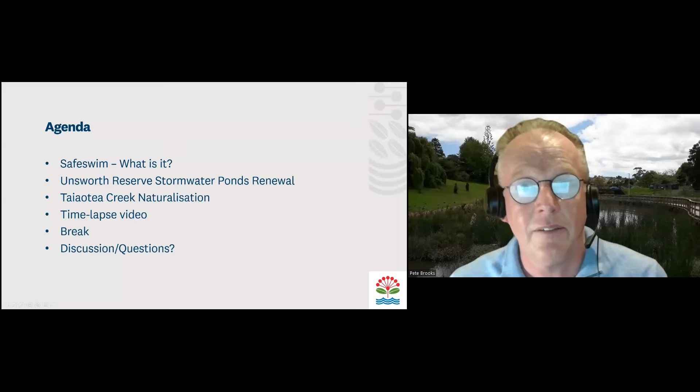Just a bit of background on why and what Auckland Council Healthy Waters Department does. Safe Swim is one of our key flagship projects. A couple of projects we're going to take you through are around the naturalisation of streams. As Scott has already alluded, there's a time-lapse video, a quick break, and then discussion and questions. I can talk for an hour and a half, but I'd rather not — really challenging questions and conversations are even better. So let's see where we go from here.

Auckland Council has a product called Safe Swim. Some of you may or may not have heard of it. Safe Swim is ultimately a collaborative program providing real-time advice on the level of risk associated with swimming at locations in Auckland. It's a partnership between some really key organisations in Auckland doing a great job, and it's spreading beyond Auckland as we speak, because there's real opportunity to combine the understanding of data across the wastewater network, owned and managed by Watercare, and the stormwater network, owned and managed by Auckland Council.

There's a department within Auckland Council called Healthy Waters with a specific target of improving water quality in our harbour, which we've been working on for the best part of 5 years specifically, though longer term overall. We use predictive modelling to do that — a clever piece of software that looks at weather patterns, tidal patterns, sea temperature aspects right the way through. All of this is underpinned by real, regular sampling on the beaches.

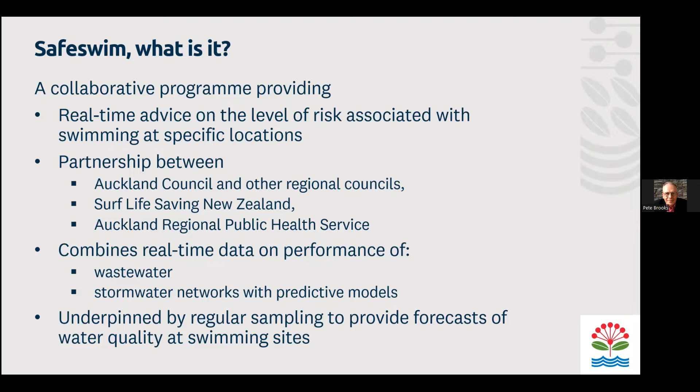Why am I telling you this? Well, everything we do — I used to be in Healthy Waters, I'm not anymore — but everything we do at Auckland Council around water quality is really based around ensuring harbour health, making sure it grows and continues to be the product it should be, and the amenity everyone can use.

So I'm going to talk to you about a couple of projects. These are stormwater ponds, and we worked very closely with Steinbring contractors — I'm eternally grateful for their involvement. They may be joining us later, and if they do, you'll get a contractor's view of how much of a tyrant I am. I was the engineer to contract on both of these projects, and I managed the team that actually designed and led the project from inception right the way through to completion.

Unsworth Reserve will be the first project I'll take you through. Unsworth is on the North Shore of Auckland, just to the west of the Upper Harbour and Constellation Drive on-ramp. In this reserve we have three ponds: an upper pond, a middle pond, and a lower dry pond. The flow of water goes from south to north, and what we're looking to do is improve these facilities, because they were built circa late 60s, early 70s. Engineering-wise, they were there to protect the environment and slow the flow of water, and they weren't functioning particularly well. There are a number of reasons for that, which I'll come to later.

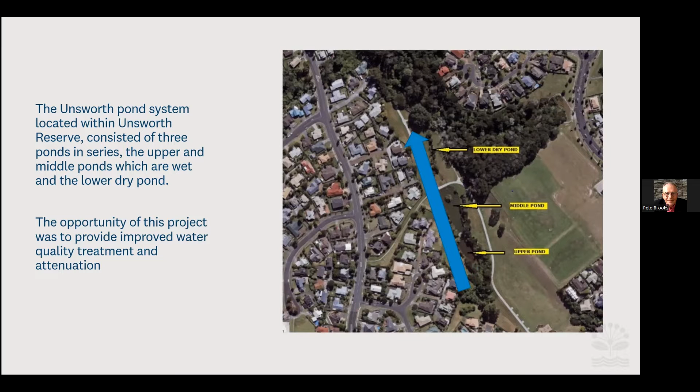What we really wanted to do was provide and improve water quality treatment and attenuation — keep the water away from the harbour for as long as we can, so that allows us to treat it more effectively.

The first thing we did was desilt the actual ponds themselves. The photo on the left is at what's known as a Truxor, an amphibious desilting machine. Basically it's a big hoover with a digger bucket on the front, and what that does is the hose pumps the silt from the bottom of the pond, which has been disturbed by the digger bucket. That goes through some flocculation and chemical treatment that captures all the solids.

It then goes through a bagged filter where it catches the majority of the solids that are flocculated out, and the water is actually returned back to the natural environment, which is tested on a daily basis.

Once that's completed, we dug out the bottom of the pond, and as you can see through the middle of it, there is a channel. That was the original stream bed. These ponds were built on an original stream, and that led to some issues which I'll come to further on. We weren't expecting to find a stream bed, and the ground conditions with that were quite challenging. To the right, you're seeing the start of marking out the ultimate changing of one of these ponds into an actual wetland to improve water quality and treatment.

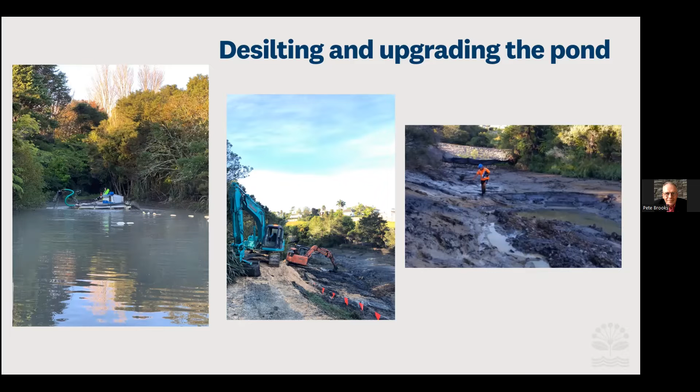Once we worked out the base of the pond and dealt with that stream bed by removing a lot of the material and compacting it, we had to bring in material to build up a purpose-built wetland. It's a significant amount of soil, significant amount of rock, to make sure the base of the pond is secure, and we worked through that extensively, causing quite some disruption to the local reserve itself, but the locals got used to it, and we reinstated it completely afterwards.

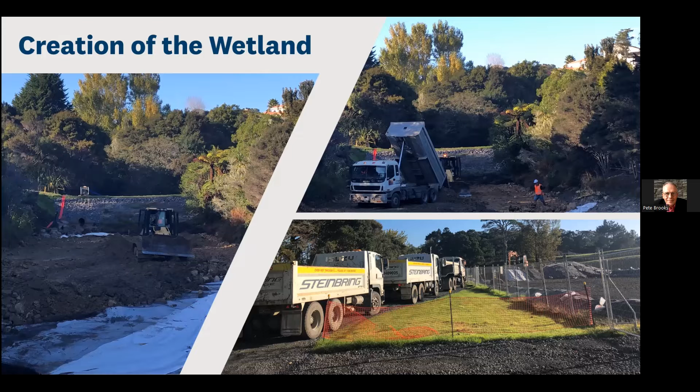Once that was complete - this is the same pond, top left-hand photo, looking north - and in my original map, the little lakes are actually deep areas of water. You want deep water, particularly in wetlands, for fish life and micro invertebrates to live, so they can breed and do everything they need to do, and we purpose built that in.

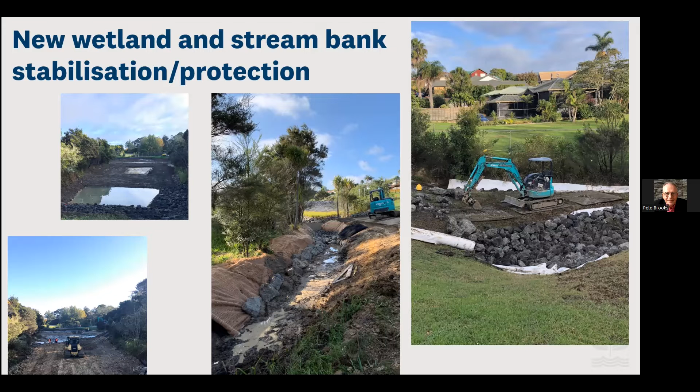We had to significantly compact the material in the base of the pond to be sure it doesn't wash away - that's the photo to the left. We also had a stream bed we needed to reinforce and protect, and this is doing that work, using coir matting and significant rock. We brought a huge amount of rock into this reserve. The photo to the right is just a general photo around the rocks and how we actually place them in the local reserve, with minimal impact as much as we can.

We actually removed a significant amount more silt than we originally estimated, and that was due to the pond being deeper than we estimated. All of the records we used for the original design were taken from the drawings from North Shore Council as it was then, probably actually the local council prior to the North Shore Council being formed, and let's just say they didn't have the detail we were expecting. We assumed there was a pond liner in the base of the pond, and there wasn't. So we had to remove more silt because it just kept going, because the North Shore clay dissolved.

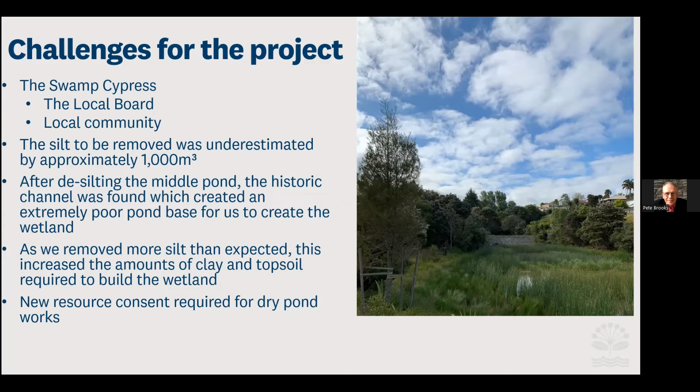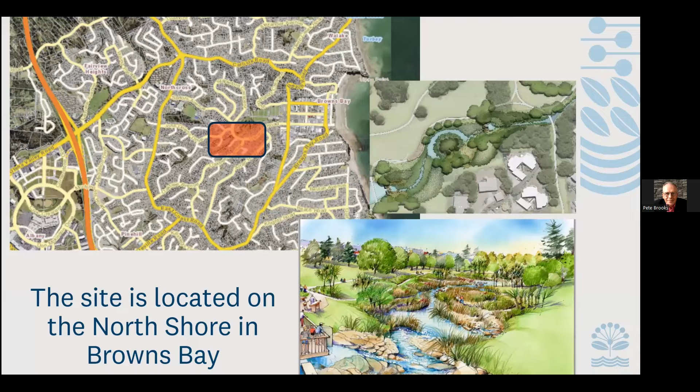That's Unsworth. Here is a slightly different project, but in a very similar vein. This is actually a naturalisation of an area. Again, North Shore, more towards Browns Bay - just above Browns Bay off Glencoe Road, if any of you know Browns Bay well. Bit of an artistic impression of what we were looking to do, how we were looking to do it, and made sure we could take things forward.

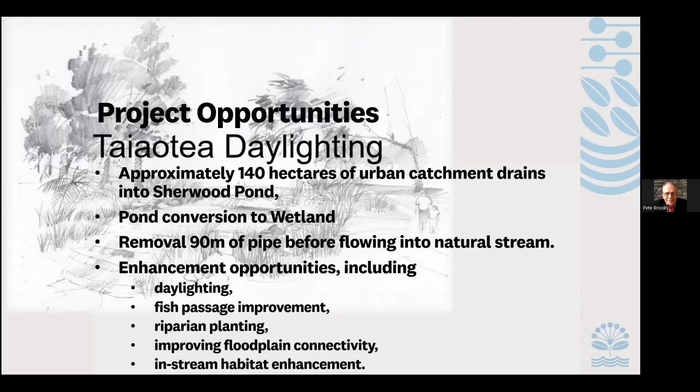Huge opportunities in this reserve, and we've actually achieved most of these, to be perfectly honest. I'm not going to go through line by line, but it's a significant catchment that actually drained into the area. We actually removed a pipe and restored a natural stream to the area. The real key for me personally is reintroducing that fish passage, to ensure the fish can get back up into the higher echelons of the catchment, because they bring so much opportunity to the environment and the whole ecosystem. Some challenges along this one in various ways.

Again, bit of an overview, so I'll start from left to right. It actually goes west to east in this case, flowing towards the east coast bays. At the bottom left-hand corner at the top, that's where we removed a concrete channel and naturalized that stream.

The forebay is the next area. This is a purpose-built area where we actually look to capture silt to prevent it entering the wetland, which is the next phase. The wetland is there to actually cleanse the water and allow the oxygenation and all sorts of ecological processes to take place.

And then we actually removed 90 meters of concrete pipe, which we used for a sign later on. And then we reinstated a lot of the riparian margin further down below, because erosion was a significant issue.

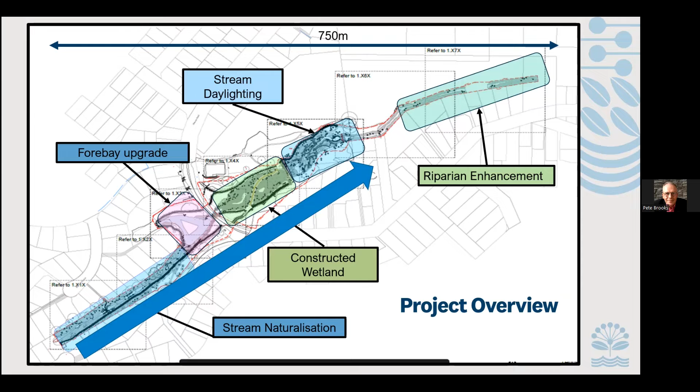We're really keen in this kind of project to actually engage with the local community and the schools. We worked very closely with all three of the schools listed. That included actually coming and operating diggers. They were there when we removed a significant number of pine trees, and it really helped bring the children into the environment and help them understand that a lot of what we do isn't by accident.

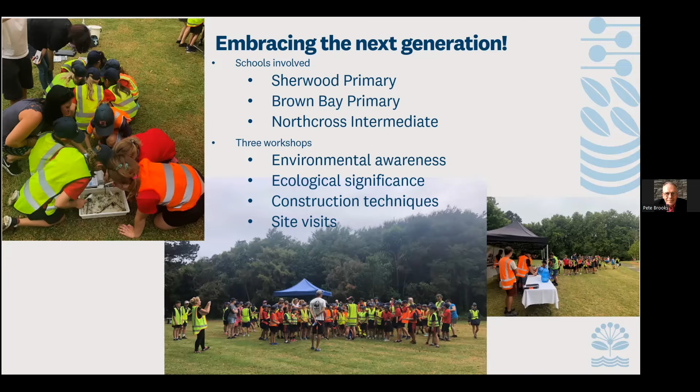Yeah, this was a project that took over 2 years to design. It's made a massive ecological significance and an improvement to the area. The construction techniques are quite unique, and I absolutely commend Glasgow's for actually working with us and really wanting to think this through. We had to adapt right the way through this. I do have to note both of these projects were built through COVID, which brought their own challenges, and we had a number of site visits with the kids, so it's been a real win all around.

Just some very quick photos through this. So the top left-hand photo is the stream before we started, showing a concrete channel. As you can see, there is iron through it - iron and manganese, that's what gives it the orange color.

That's a particularly interesting bridge that was over the stream at the time, which we completely replaced, working with our parks colleagues. The bottom left photo is actually the start of the process and how we naturalized the stream - starting to put meanders and bluffs into it with rock ripples, coconut matting for planting. The bottom right is the new bridge in, with the planting starting to establish itself.

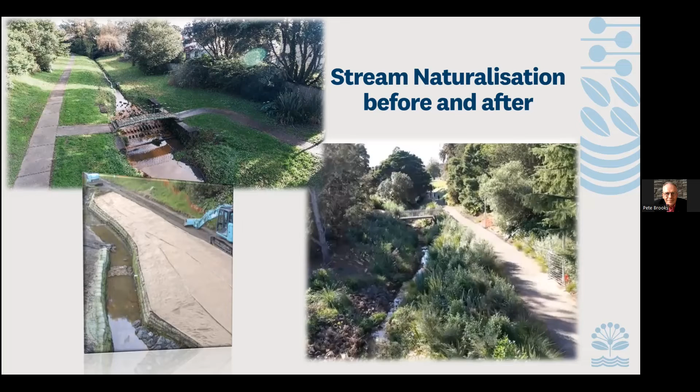The forebay, as I've already alluded to, is there to actually de-accelerate the water, which allows the sediments to drop out in this location, and then what we can do is come back once it's filled. We target every 5 years to actually come in and remove that silt.

The photos in order - top left is before we started again. As you can see, it's significantly clogged. It's not actually operating as a forebay, and we removed all that planting, all that vegetation, and redug the base of the forebay.

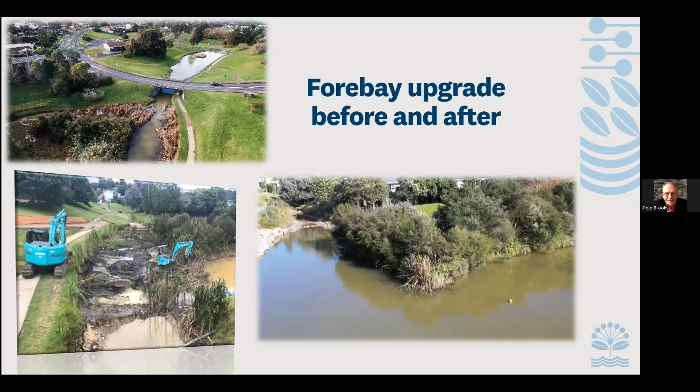Again, no pond liner, which caused significant issues. We removed a huge amount of silt from this site, and the photo on the right is actually the completed works at that site. You actually see the bottom of the forebay, which in my experience we hadn't even seen beyond the top couple of mils, let alone the bottom of the actual pond, which is a real achievement.

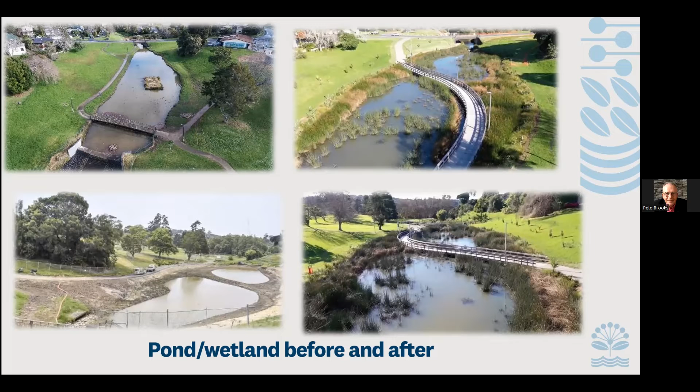The bottom left-hand photo is the work in progress. Again, a deep area of water, and we put a boardwalk through the centre of it, and the two right-hand photos give you an idea of what we did and how we did it. There's a boardwalk that runs right through this as we speak.

Coming back to that fish passage piece, as you can see, that top left-hand photo again is before we started. There's absolutely no way fish were going to actually make their way up that slope. It was designed so they could, and we did get a reasonable number of fish out of the forebay and the pond, but most of them were koi carp, and there were a few eels.

We had to isolate the pond and drain it for construction reasons after we'd done a lot of the work, and we'd reconnected the fish passage, and we ended up removing 28 eels, and they had actually established themselves in a minimal amount of time, probably only about 6 months. So that was the idea.

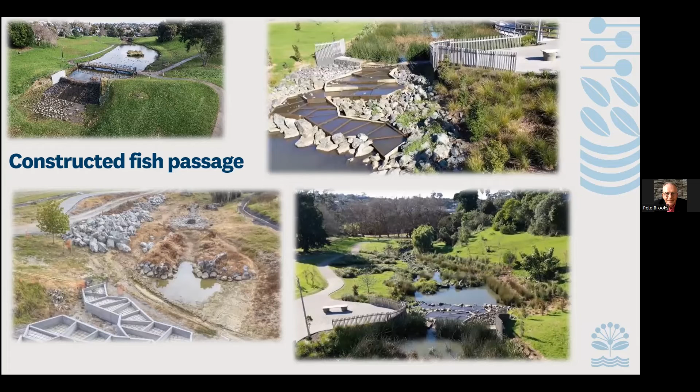It's a wonderful sound. If you ever get the chance to go and have a look, it's incredible. The two right-hand photos again are the actual project completed. We deliberately built a viewing platform actually to try and help people connect with the environment itself.

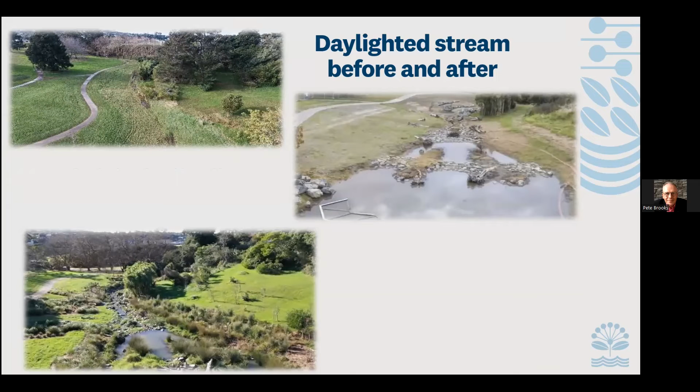Daylighting the stream, as I say, this is the 90 meters of pipe, so we took that grassy, muddy slot of land that was low-lying that we overflowed and created a naturalized stream. The right-hand photo is the work in progress. You can see the fish ladder has gone in, but there's no planting or naturalization done yet. The bottom left-hand photo is actually the completed works again, and that stream runs permanently.

Challenges for this project. Again, as we've already assumed, the top pond was built as a forebay, which it actually wasn't. We ended up removing an additional 3,000 cubic meters at the cost of over $1.1 million alone for this project. COVID lockdowns throughout all of it, which was brutal, and our contractors worked so hard, and actually were back on site as soon as they could be.

But equally, we had next to no time to actually make this site safe and ensure that it was secure while we were all locked up at home. We actually lost the project manager for this job due to them being a contractor, as an impact of the Auckland Council emergency budget, which would cause significant issues in actually continuity for the understanding.

I was still the engineer, but actually the people running things on a day-to-day basis changed. The removal of the concrete channel created a real challenge that I hadn't actually thought of. This is all good learning. Removal of that concrete channel, we removed the weight, and what that caused was the slopes to move, and we ended up having to build an in-ground wall to prevent that rotating. Hadn't actually thought about that prior to this, so the lesson learned is actually just leave the concrete in place and design your levels around the new height, because it creates a significant number of issues.

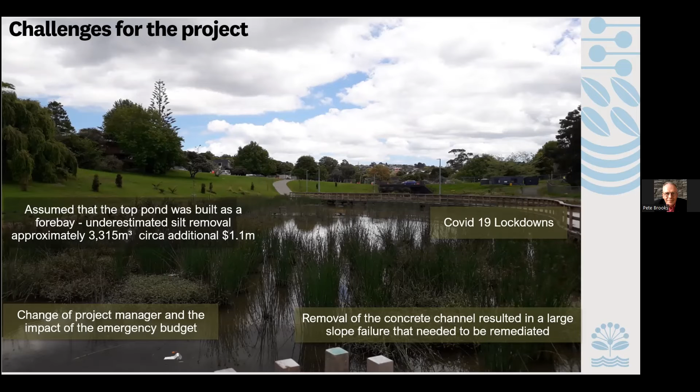Time-lapse video. I shall see if we can make this work. So, here we go.

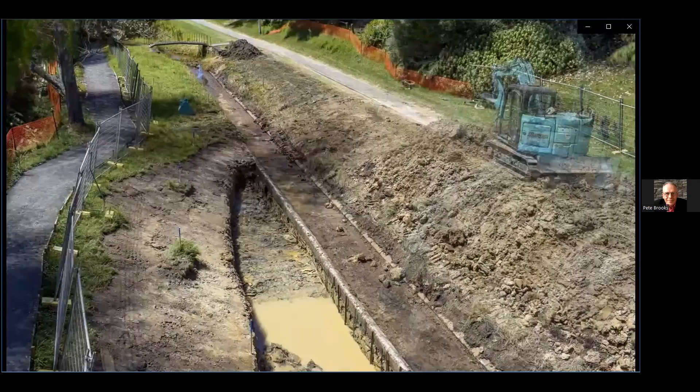We're starting at the top end of the project, with removal of the concrete channel. That's the actual slope that failed. We're working through naturalizing the angles and actually introducing flow. Some matting to protect the sides is going in, along with a root wad, which is just a tree trunk, but fish and invertebrates really like it. It actually enhances the whole environment.

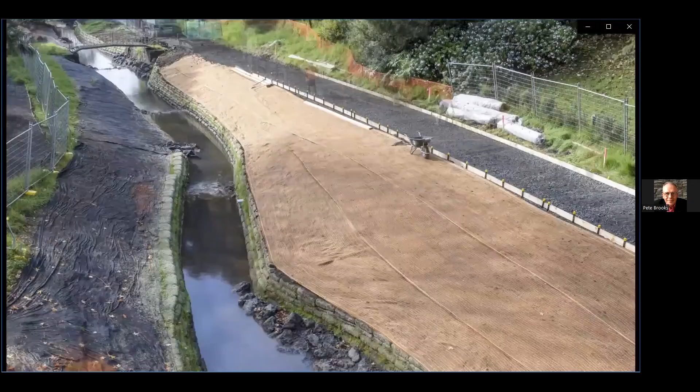Coconut matting prevents weed growth, and that's all without plastic, which is really cool, so it doesn't create microplastics. There's removal of the silt and creation of a new path down the left-hand side of the stream.

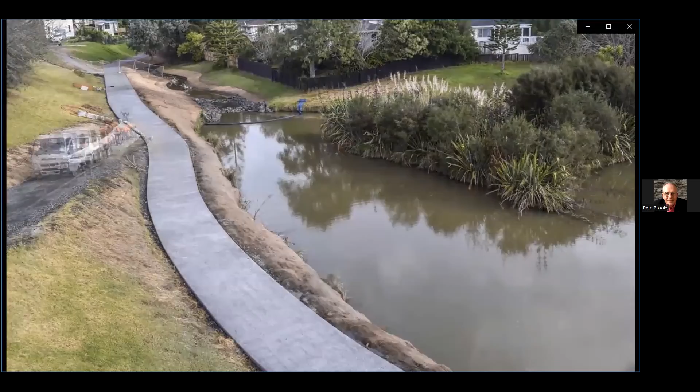Concrete path, 3 meters wide - a nice access track for future maintenance. This is the fish passage going in, as you'll see on the bottom left-hand side.

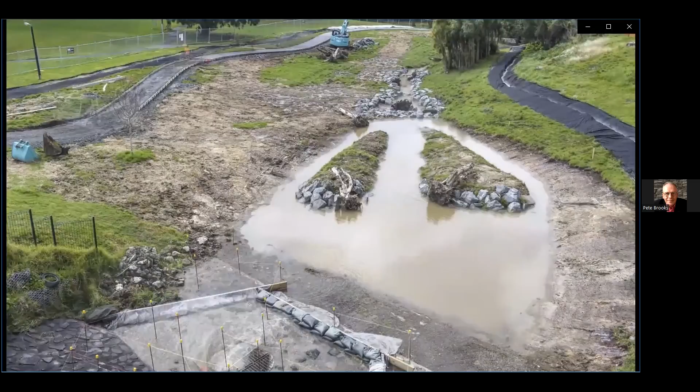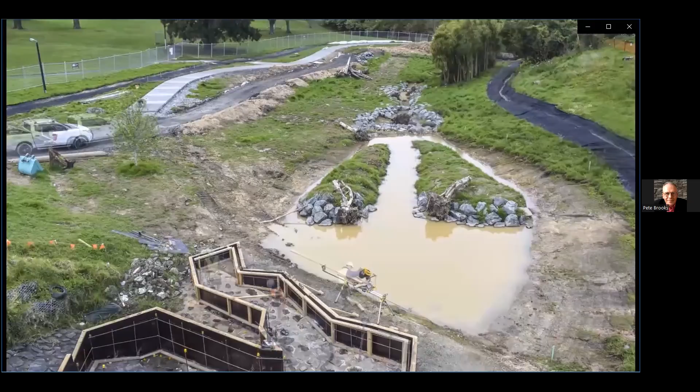Here it comes. Really clever construction method - we had to make it as light as possible, and Kate can talk to some of that later maybe. But I was really impressed at this. This works so well.

Looks so simple when it's done, but the angles and the heights was really a challenge to get right.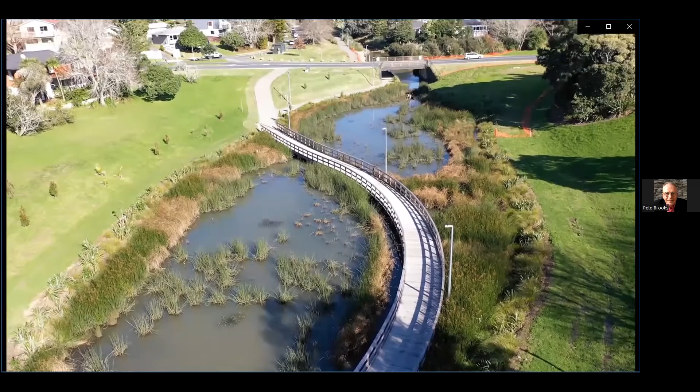We built this project to deal with the water quality at Browns Bay Beach and the fact that it was failing on Safe Swim year after year, but the outcome of the other stuff is significant in that space. Stop share. So that's it from as far as the presentation goes.